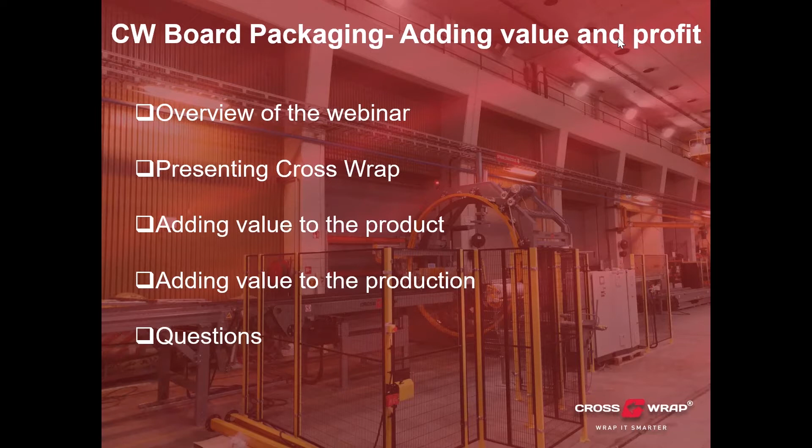Briefly about Cross Wrap as a company. Cross Wrap has over 25 years experience in engineering, manufacturing, and selling machinery to the recycling industry, to the paper industry, and to the wood and board packaging industry. We hold patents to all of our solutions, and we are based in Finland since 1994. Today we have deliveries in over 60 countries and around 600 deliveries.

As said, I am Martta Kivelä. I take care of the Italian market, and I do help out Kalle with the North American market, especially the west coast of North America. Then Kalle can tell a bit what he's doing in the company.

I do the sales in North America and Ireland, UK, New Zealand, South Africa, and then I do some help for the people on their sales and technical side. I have been in the business for 30 years and started out in service and installing, training, and so on.

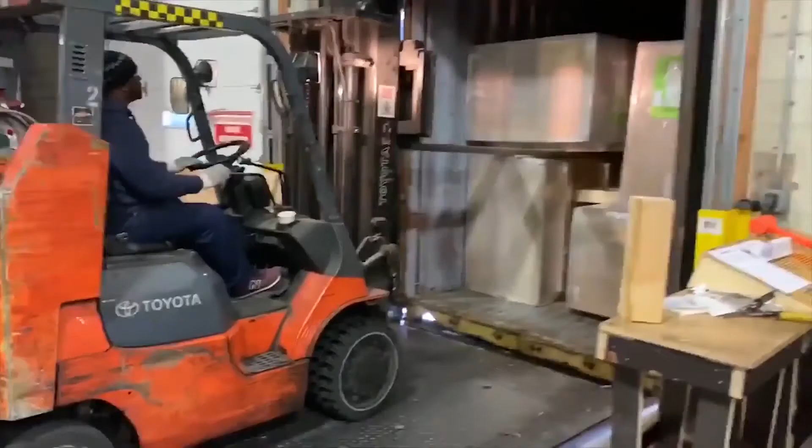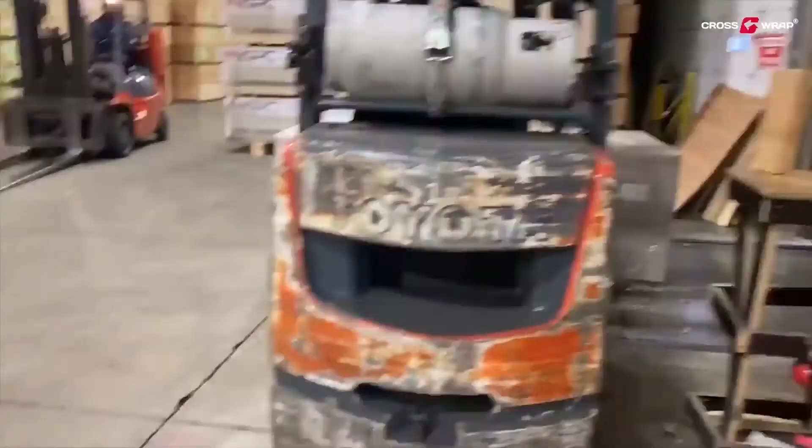So these packages come from Russia and are exported to US. As you can see, the container is packed in an efficient way. Some of the stacks are sideways and some are in a normal position, but the space is used

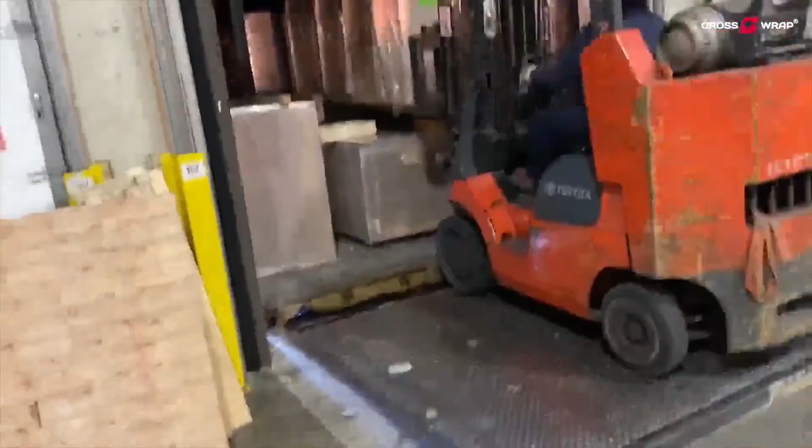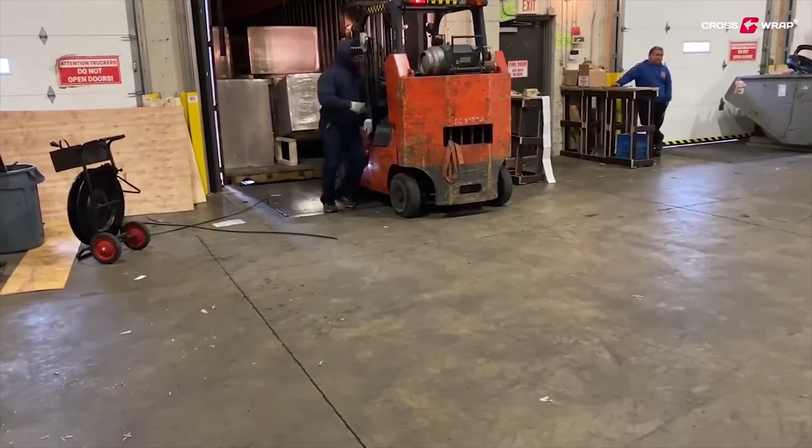really efficiently. Then when we want to turn the package that has been sideways, we can just flip it with a forklift, which you cannot do with a package with only straps or cardboard or manually wrapped with plastic, with film, sorry.

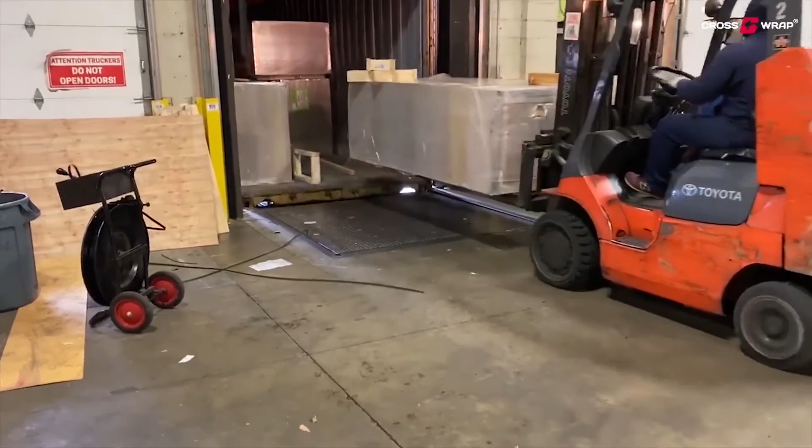And as you can see, these packages exported from Russia to US don't need any corner protections or straps. So wrap it right and wrap it tight, as we say it in Cross Wrap.

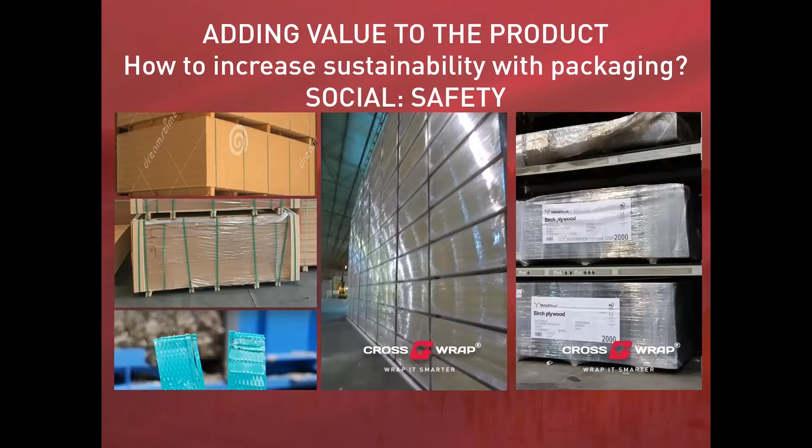Back to the presentation. So then we will have a look at the 3 aspects of sustainability. First aspect, the social responsibility. So, as we mentioned before, part of social responsibility is the promise that we make to the customer. We make the quality promise of our quality product that has to arrive to the customer

undamaged. With Crosswrap stretch film, 6-side stretch film packaging, we can do that. And the quality stays equal in 24/7 running operation. On the left side of this slide, we can see the alternative packaging that is tied with strap.

For the user experience, the strap means a safety issue within handling and transporting, because if we have the slightest damage in the tying of the strap, that means that the package is already unsafe to handle. Also, from the point of view of opening these packages, the opening of the plastic strap, not to even mention if we have a metal strap, is a dangerous process.

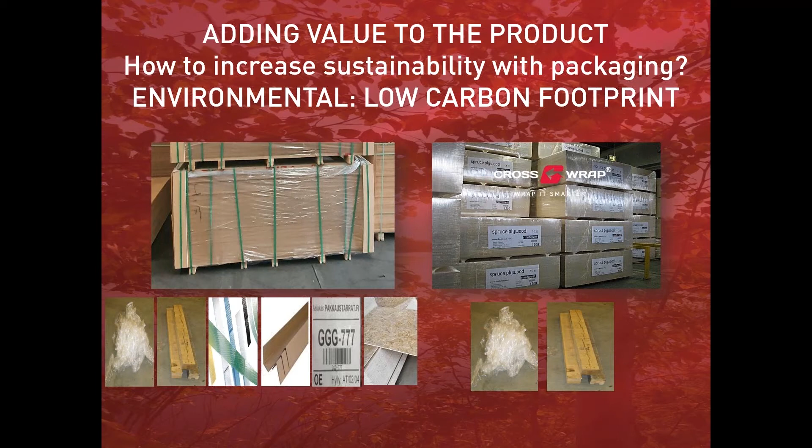When in cross-wrap packaging, we have to have 2, and if we want to put also the labeling here, Kalle will explain in a bit how it's done, but the label is pure paper. So every factory, every client, or in most of the countries, we have the paper recycling, and that's the most basic recycling we do. So cross-wrap ingredients are 100% recyclable.

So another thing is how much we have to use the packaging materials. So this is partially economical, the third point of sustainability, but also partially about the environmental point. If we start from the pictures below, as said, all of our wrapping is programmable. So, for example, in the case of the picture on the left corner, this is a package from our client from Finland where the material is going just 10-15 kilometers from the factory. So they have put only the plastic around the bottom skids, saving material.

Well, the next option is if we have like a national transport or short transport within Europe or within US, for example, we can do only the vertical wrapping. As you can see, even in this one, we already cover the corners really well. So the boards are protected, but at the same time, we save material and of course we save in packaging cost.

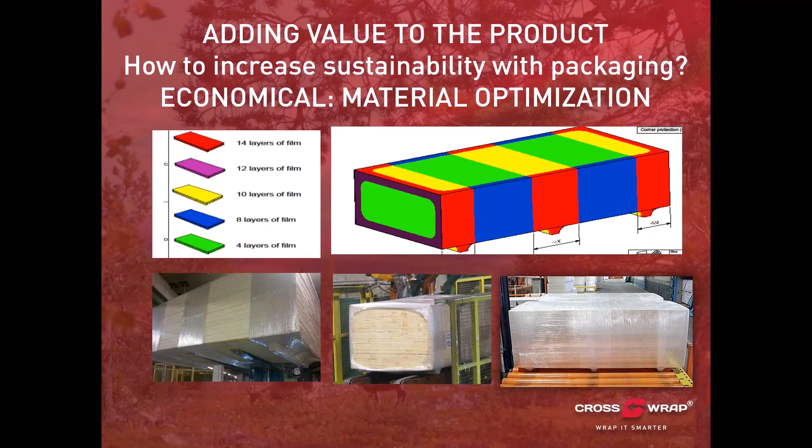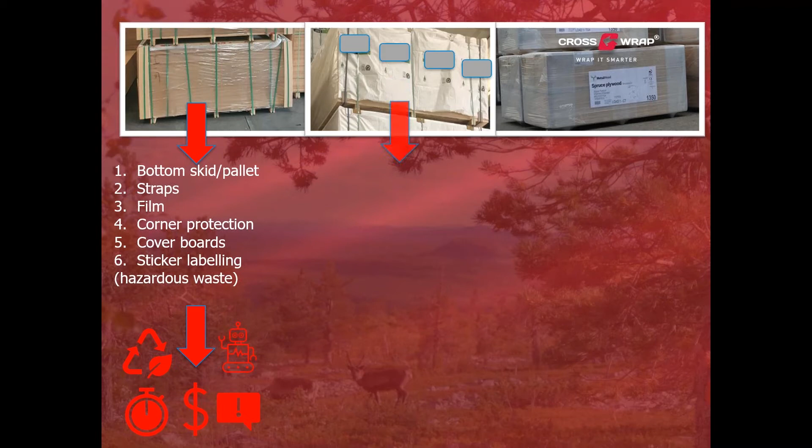So then a second alternative option, not Crosswrap. We get more or less the same materials, except the plastic used is a bit different. It's like a plastic cover, or plastic hood, some call it. So that is not weatherproof and not waterproof, and especially if we have the boards coming from the production with a bit of heat on them, if we put the hood on directly, or if we have an environment where there is moisture, we get a greenhouse effect inside of the package, which again damages the goods.

So the same things, recycling value is low and the process is challenging. This is time consuming because this is a partially manual process. We use money for the partially manual process and all of these materials. The reclamations are a risk because the package is not tight on all ends. You cannot flip this kind of a package as we saw in the previous video, and it's not an automated process.

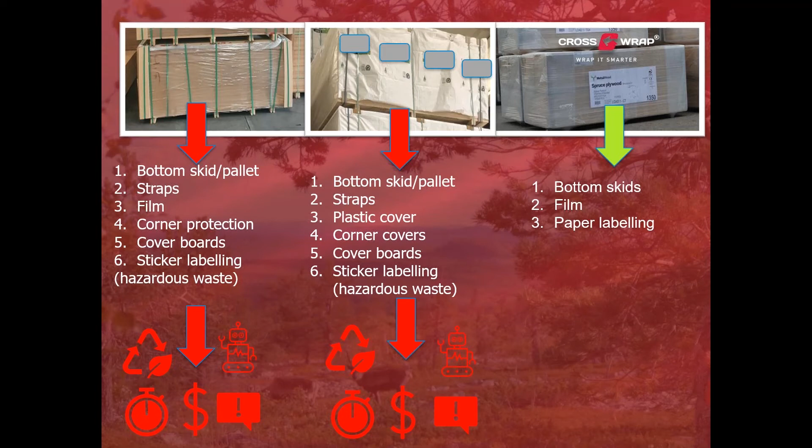All right, last but definitely the winner is the Crosswrap packaging. Maximum of 3 materials: bottom skids, film, which is 100% recyclable, and also now we are doing testing with plastic film that is made out of recycled material. So the recycling value is good.

The packaging is completely automated, no manual time used. We are saving in material costs and labor costs. We get good feedback from the customer since we are clearly informing and communicating with our packaging, and the customer experience of the package is good. And most of all, the process is fully automated.

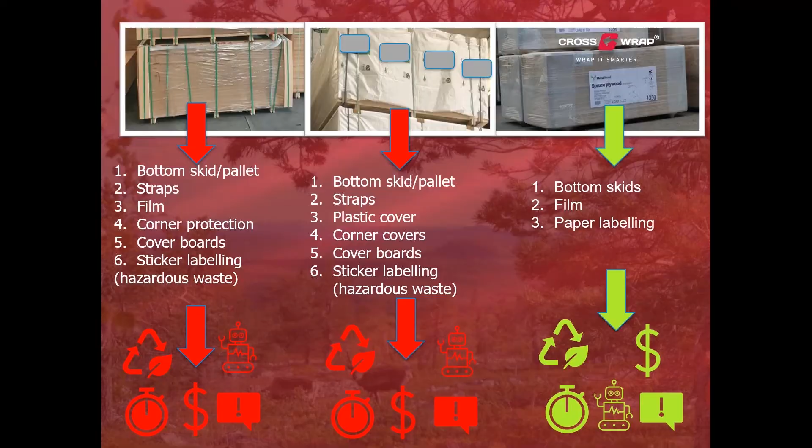All right, that was my side of this presentation. Next, we will go to adding value to the production, and Kalle will take this over. All right.

The line today is fully electric, with low electric consumption, and it's low maintenance, which means low costs in using this kind of line. Remote access has been in our machines since 2013, which means we are able to serve you wherever you are. We are in 60 countries, serving a lot of people in 24/7 operation. We see that as important. We don't sell our machines without that connection, because our machines are made for it,

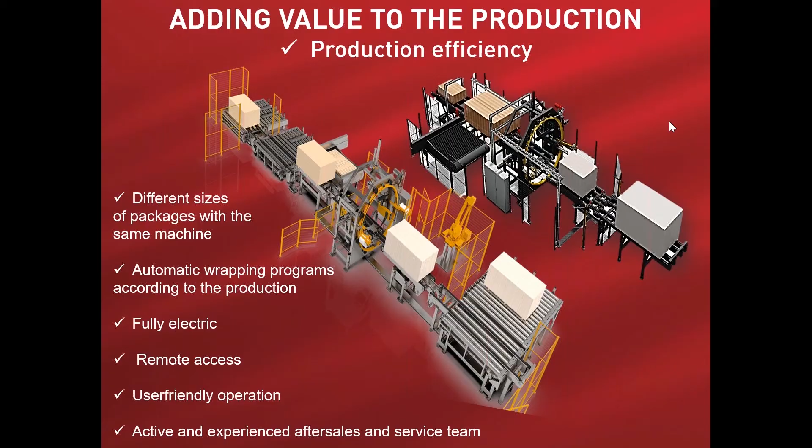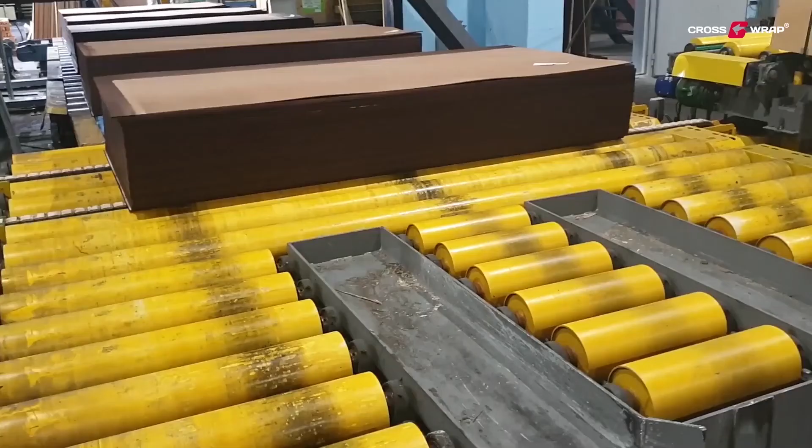But let's look at a video of how this system works. As mentioned before, we can make a line which comes directly from the production. We have made lines that pick up different packages from 3, 4, or 5 different production lines, because the line can do everything automatically. It doesn't matter which kind of package is coming. It will automatically measure the package and take it further into the production.

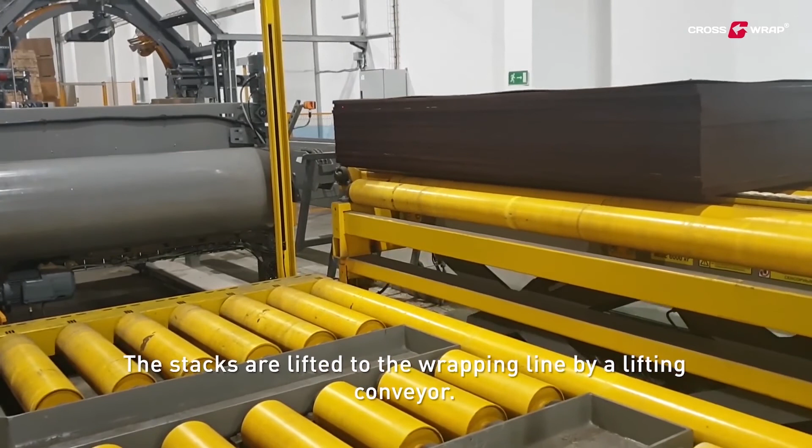In this case, this package is now measured automatically by the line, and this is the guy who runs the whole packaging process. The machine itself chooses what kind and what length of supports, beams, called bottom skids, you put under, and we can choose how many we have. You can choose where they are, if you want to put 2, 3, 4, 5, and how many you put for different lengths of packages and where they are.

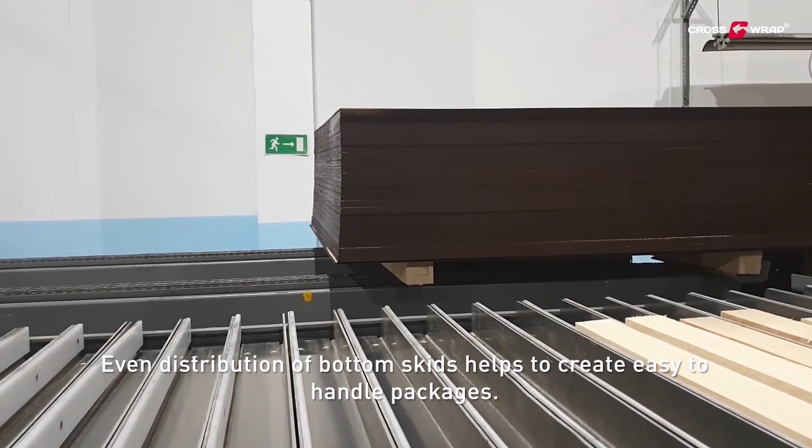And it's safe, of course, because it's inside the fencing, and the machine does that automatically. That's one part of our strategy and idea: safety comes first in all this packaging, because as long as we take the machine into our line, everything happens inside the safety fencing, so you don't go into the areas where the package is moving.

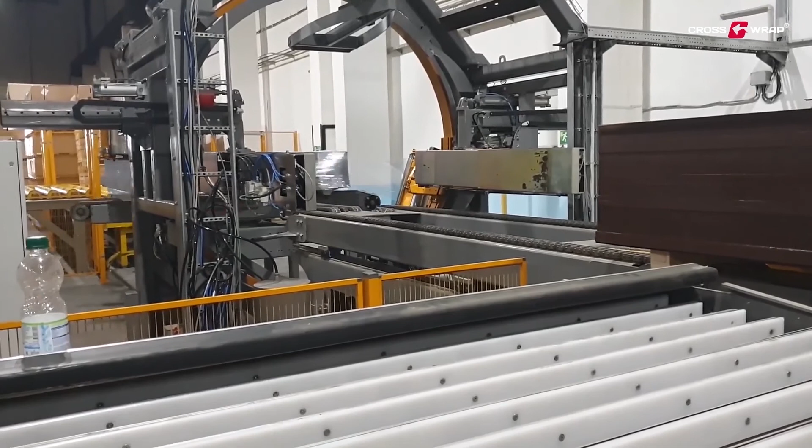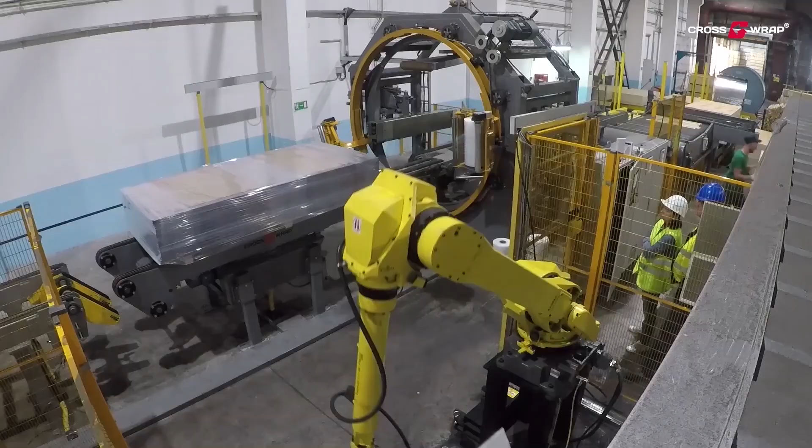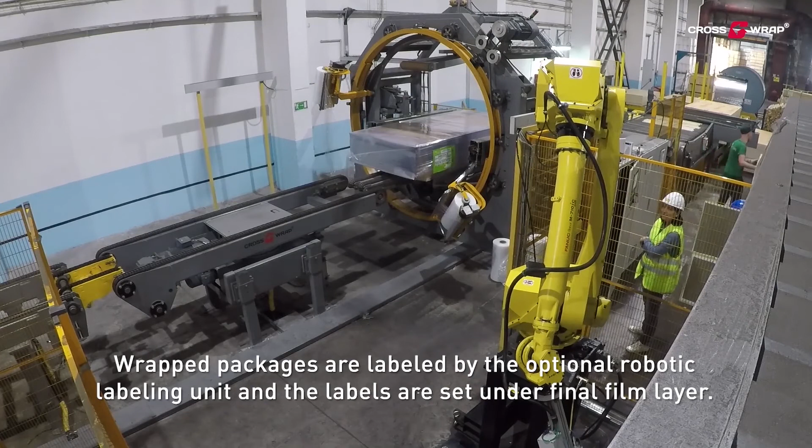There we see one package already in production, and the next one is coming in. The conveyor in between here is the first wrapping conveyor, where we have a weighing system if it's needed. If the weighing system is there, then this label already has the weight of the package and other information. That label, in this case, is just A3 paper from a normal printer, and you can provide that information from your system.

Then when the label is on the package, we put the cover, the last final wrapping, on it, so the paper label will be inside those last layers, and it's visible and you can read it. If there's a code or something, these couple of layers of highly stretched film don't bother the reading of the label and marks.

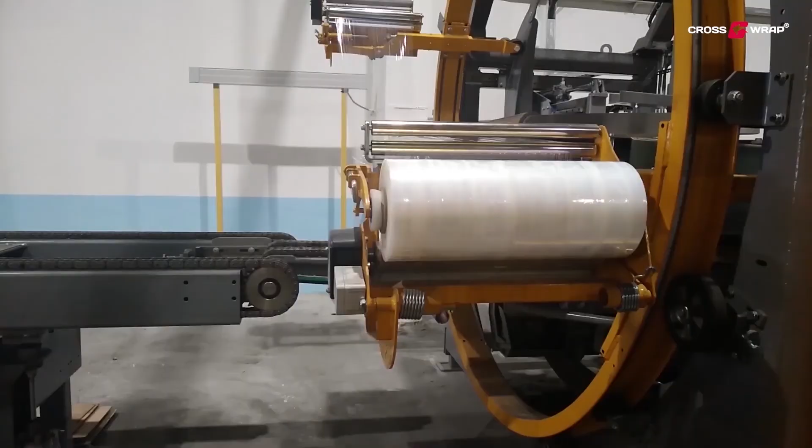So then when the package comes from the production, there's a first step when it's measuring the package and then finding the place where it starts.

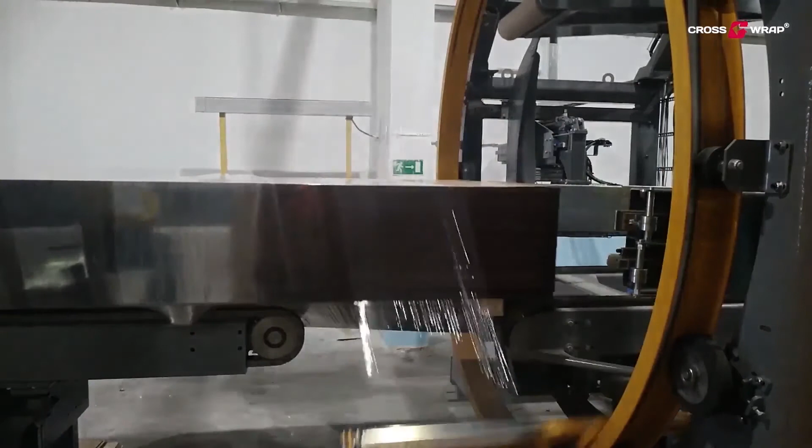We put the film over the corners and underneath on the first support skid, and then it goes further, and here we put the extra layer after the second one. The machine is recognizing where those supports are, that the film comes in the right places, and we optimize where the film is used and how much we use.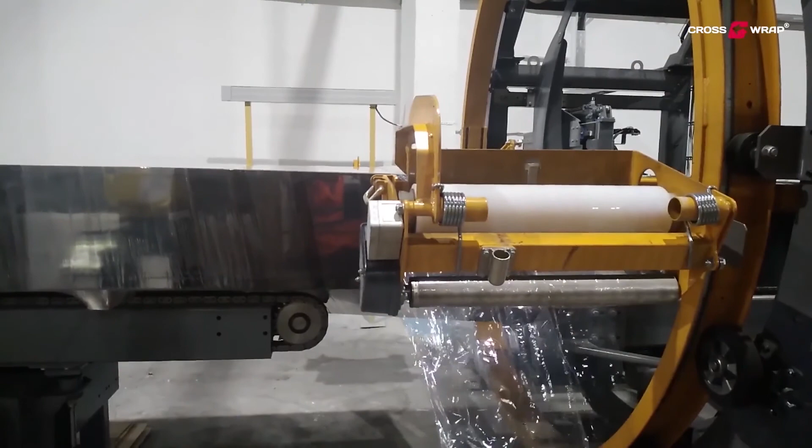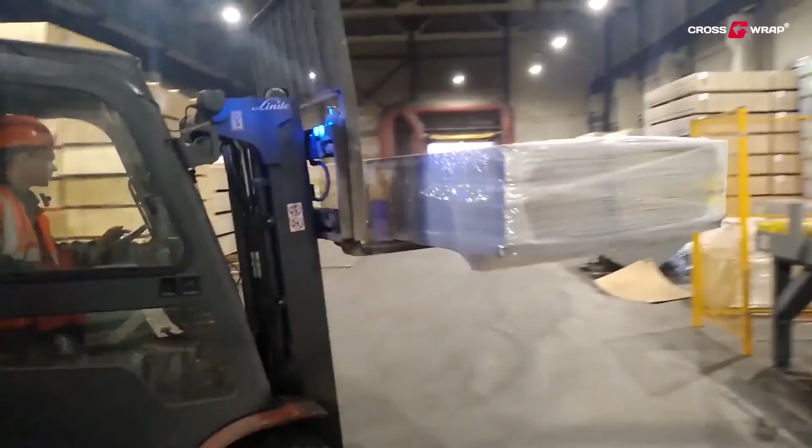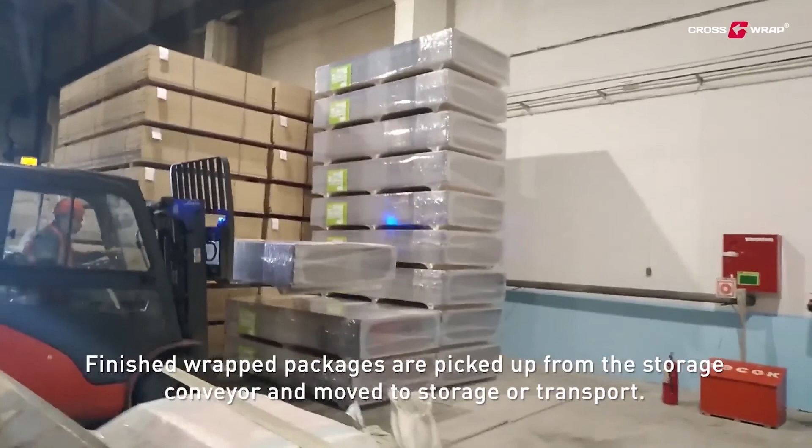All this can be programmed, and there are different recipes so that for different materials you can use a different amount of film, so you don't waste film, but the other way around, you have enough protection for the package so it can be safely stored, moved, delivered to the customer, and your valuable product will be even better when it reaches the customer.

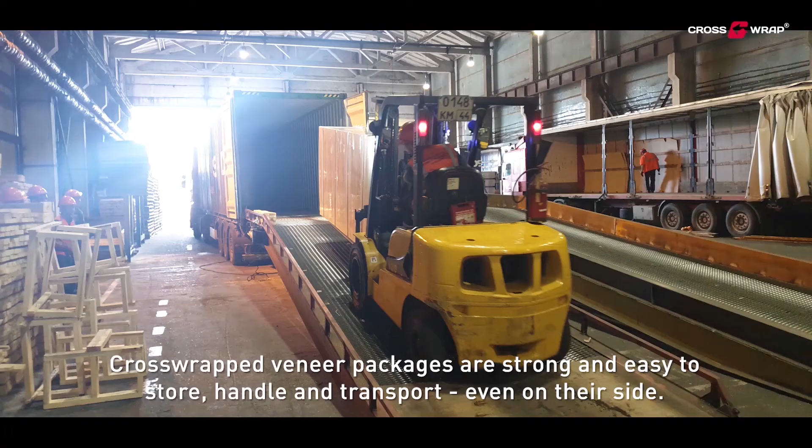That has actually been tested, for example in plywood or other wood-based boards, that the moisture content in a package will level out when it's stored in cross-wrapping. For example in veneer, it's nice when it's leveled and every single veneer package is the same after staying in our package.

Here you see the container, how this one is packed. You see how you load it, but yeah, we can do those turning packages as you saw there.

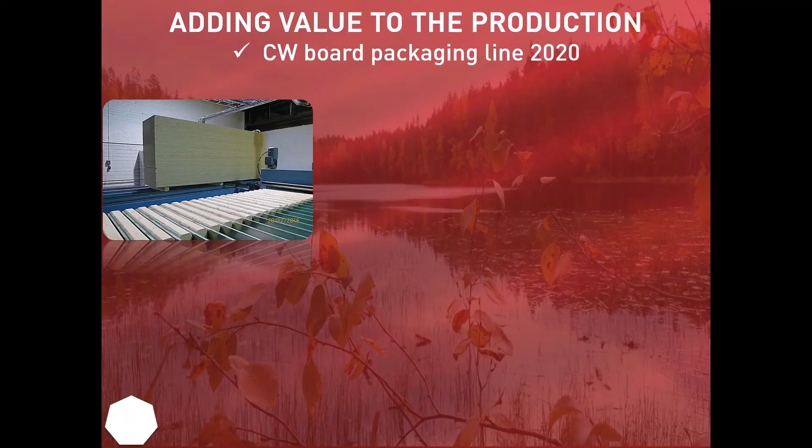Okay, let's check that process again once more, easily. The first step, we can make those conveyors so it comes far as the packaging. Here we have the line that it's coming in, and the package is measured, and this bottom feeding is done. On this conveyor where it goes, we will make the weighing for this package too.

So well, we have an option for semi-automatic skid feeding too, that if the volume is low, the same person can do the skid feeding manually.

And it can be done in a process. Then we have the first wrapping cycle, we saw that already once, that when it starts and is done, it's protecting the corners and taking the skids under, and that's done in the first step.

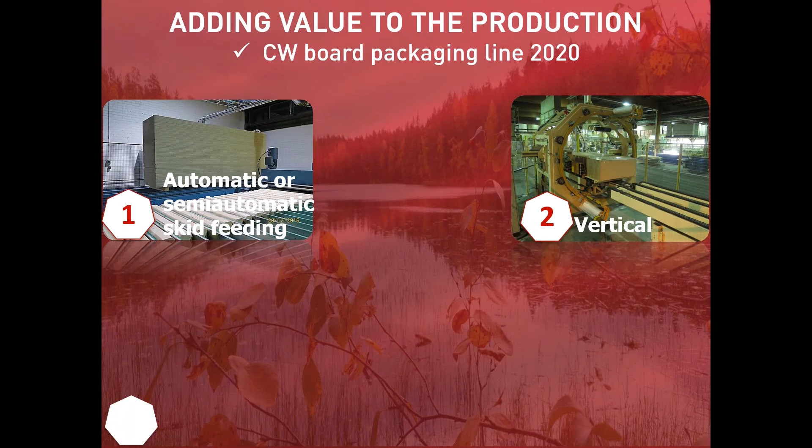Then we go for the second step, where we do horizontal wrapping, which will protect the corners again, and there will be overlapping in the corners to protect against the moisture.

But one more thing which is really important here, we call this cross-wrapping 3D, which means we have first vertical, and now we make it horizontal, meaning there's a vertical layer underneath the horizontal that ties up on the side, and at the same time, for example in a program here, we add a couple layers of vertical.

The horizontal, we can do for example the tongue and grooves without any extra protection, what our customer has been doing for years and millions of cubic meters, very successfully.

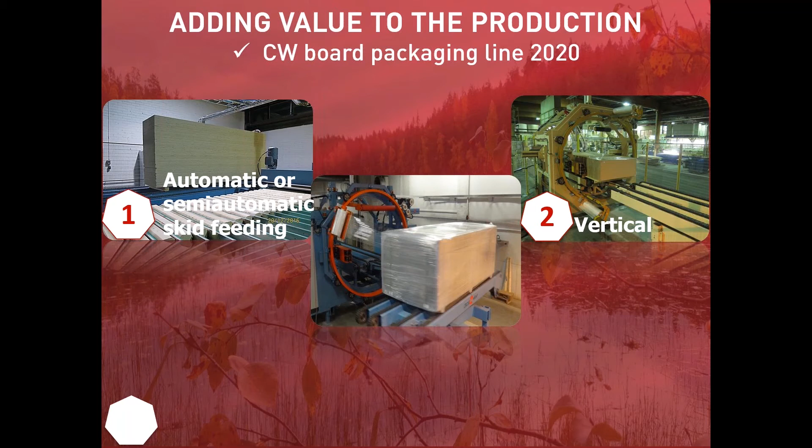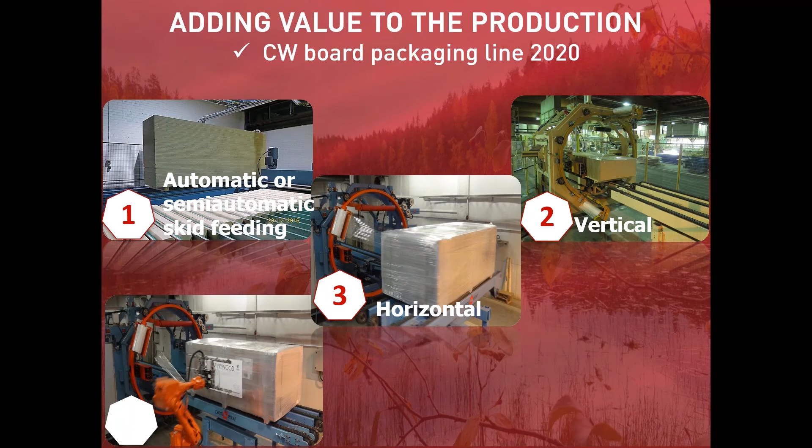Then the next part is the labeling. Here you see the labeling unit, which is putting a bigger label on it. That happens so there's a big label with, for example, the company's logo and stuff like that, and then you put a second smaller label on the same paper, and then it's put on the package, which is an easy way to make your product look more in line with your company profile.

And then we are finishing the package with the vertical last layer, which is part of the 3D, an important part so the package will withstand all the handling and the moisture and so on, because the third vertical layer makes a cross-wrapping onsite, which, for example, when we have a high cross-wrapping onsite, the package wants to remain in the same shape.

That's very important for transporting the packages, which you can't get this kind of advantage from any other packing system.

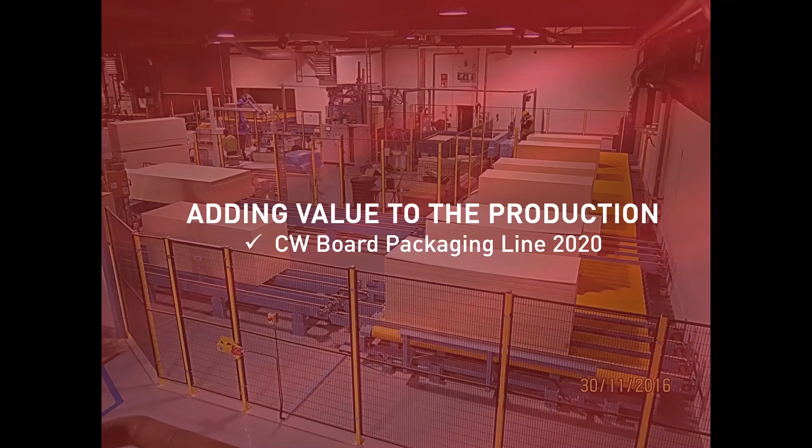So, adding value in production. Here you see one production line where the packages are coming from two conveyor lines direct from the production without any forklifts on the way. There's one person looking after the machinery. Right now, he seems to be sitting there and waiting for the machines to do the work.

The packages are coming in. We make a weighing. We put these beams underneath, the bottom skids. We put the label, and then it goes automatically out from the door, which is behind there, to the storage where it can be picked up.

Huge savings, environmental benefits, and only one person needed, not a lot of staff, and then there's no forklift hassle or any danger for the operators. So that's part of our idea.

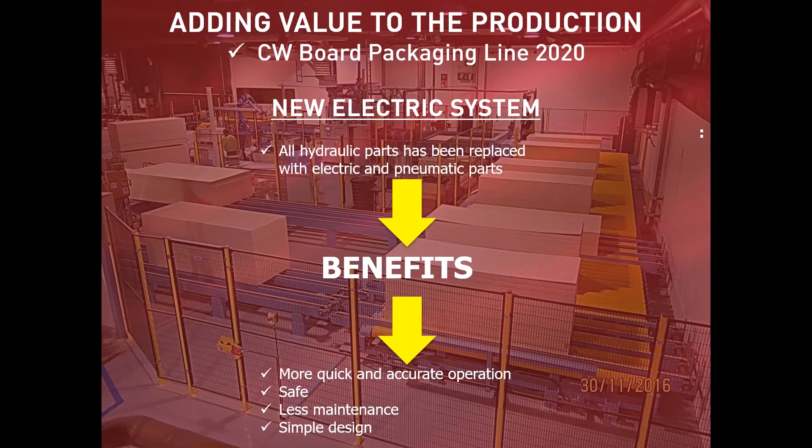What is new today is that the whole system is electric, and that means of course it's quicker, more precise, safer, less maintenance, and a simpler design. It makes the whole thing more simple, stronger, and cost effective, meaning less cost for you.

There's just a few examples of what we have done in our latest machine. On the right, I'll have to point out that the main thing is the stretching unit, which makes the film stretching, and of course how and where the film is put is important.

The 3D cross-wrapping system is the only system which can give that kind of withstanding for the package, as we do today, and where we have got our reputation having the best package in the market. There's a lot of customers who prefer this one, some in Mexico and some in the US, who like to have only Crosswrap packages, and we hope to serve them in the future.

But the example, the stretching unit here, it's very simple, strong, and it's fixed so that you can't change these gears. It will keep and do the work year after year.

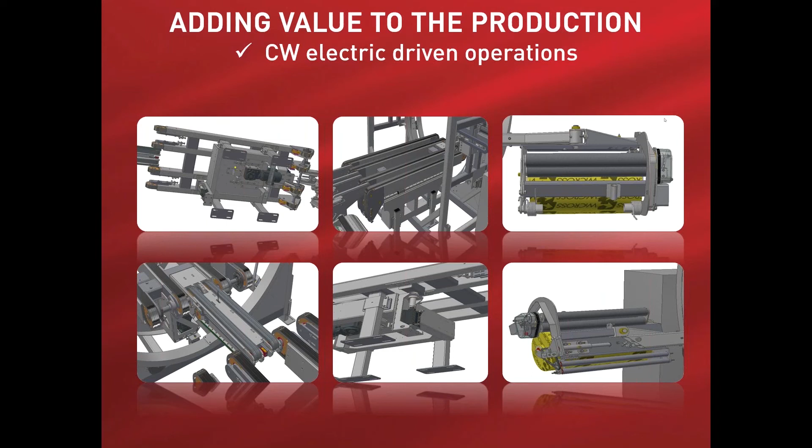One other thing where we have been concentrating development and experience is the seaming unit: cut, hold, welding. Everybody in the packaging business who works with any film cutting, holding, or welding systems knows that's the place where service is needed the most. This is a new system which is controlled by our program.

It has pneumatic cylinders, and its main function is run by sliding bearings, very heavy ones, and then there's fluid muscles. It's a very simple construction, meaning that these main parts last for 1 million cubic meters. I can say that this is top of the range in the business, having the most reliable unit in the market.

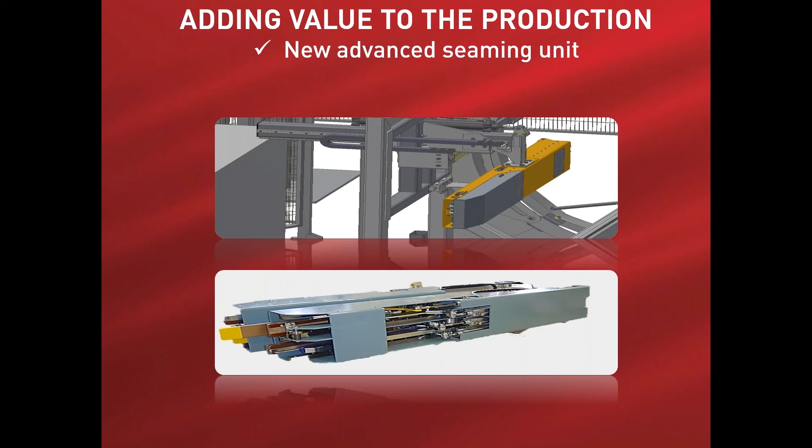This is an example, and most of this stuff we can upgrade on the old machines. That's one of our priorities - we like to serve our existing customers and upgrade them with our development, which we've gotten through customers who have already driven millions of cubic meters of different kinds of boards. There are machines which have already wrapped over 2 million cubic meters.

Then I would like to point out that in electricity, we have moved to a decentralized system. On the left you have the kind of conventional electric system where all the cables come from the main control unit and go to the sensors, inverters, oscillators, and movements.

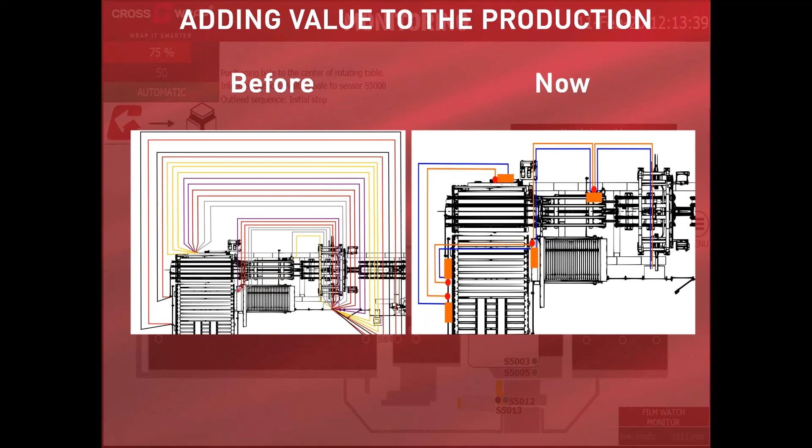But today we have only a few cables, and they go to the main inverter box where we take them out for sensors and so on, which means it looks like this today.

One advantage here is, for example, when installing the machine, you just have to have an electric guy for the main electric, but all these are connected by plugs, which are industrial plugs - you just put them in and that's it. You can't make mistakes on those, and the connection is better than man-made on every single connection.

Cables are better protected, it's easier to follow, and it gives us more possibilities for remote control. It's just a piece of art today, but it gives you an advantage - it's easier, it's safer, and it's costless service-wise, and it's easy to check what's happening if anything is going wrong.

So today, we have been moving - well, we have always been with Siemens, but we now have the Siemens S7-1500 series, which has given us more precise programming. It's faster, and it's the latest model which will stand again for years, giving you a benefit in the long run.

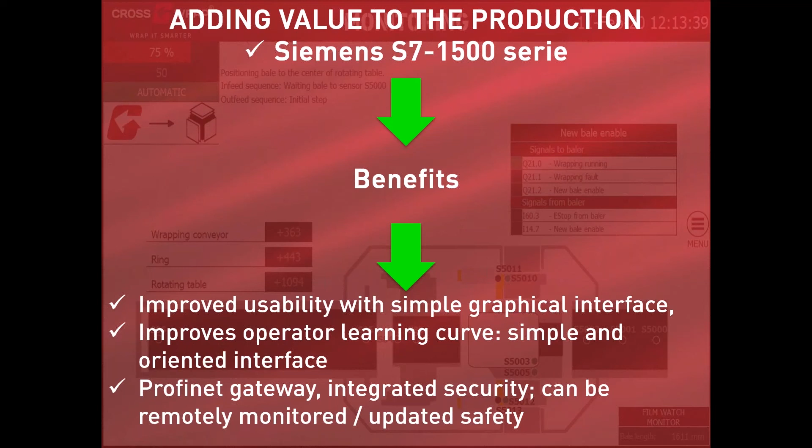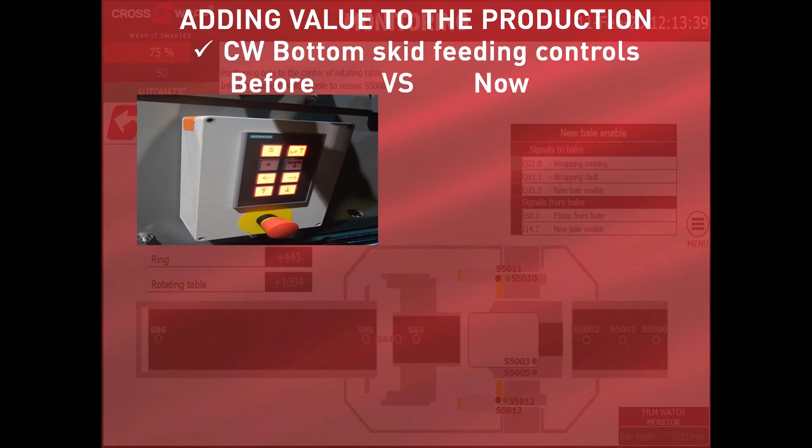An example here is the bottom skid feeding - this is what we had before. You have push buttons there where you can just move the skid feeder somewhere, but we moved it to this kind of touch screen where everything is available and visible. You can run the conveyors and run the bottom skid feeder there, and it's easy to run.

It's just visible. You can change the language for yourself, and from the same box you can choose the programs for where and how many skids you will put in different places. We have different programs that you can save to memory, which puts different skids in different places.

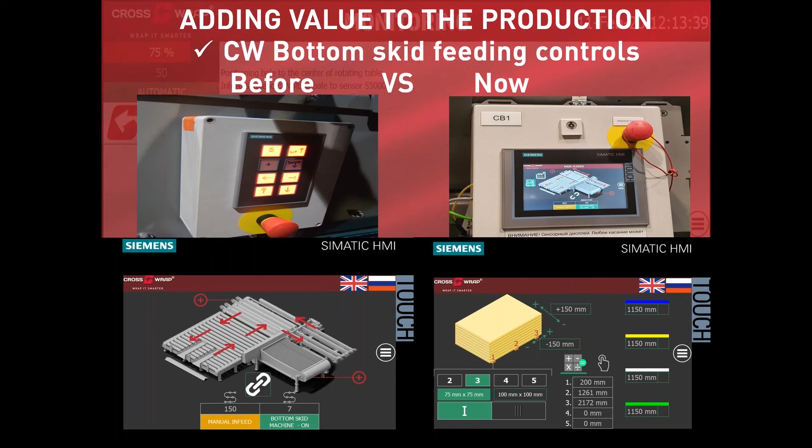That's valuable because you will only use the skids you need. And when putting the skids on, our skids don't have to be the length of the package, meaning you're saving on those costs too, because they are shorter, and because they are underneath the wraps, you can use materials you can't use if they're not protected. Think about using skids which will be lower cost - that will be an extra saving on your packaging.

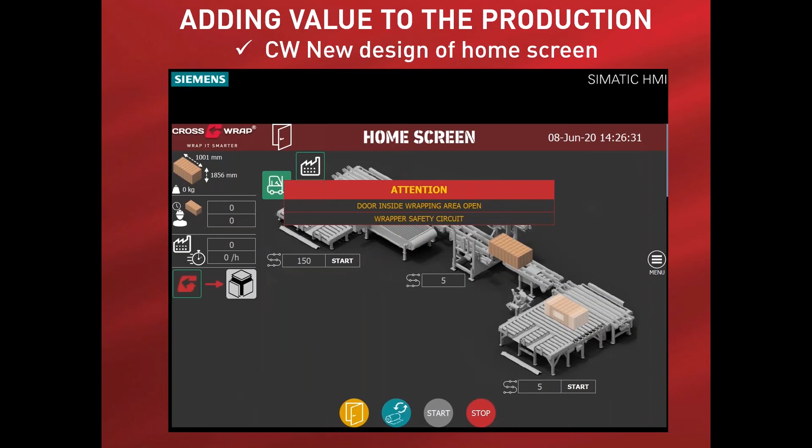There's our screen today, which is very visible, shows you most of the things, shows where the package is traveling on the machine, and the push buttons below are on screen, that they are not built in anywhere else, that you can just do everything from this screen. And the help desk is quite large here, that we have been concentrating on making it easy for the end users and operators to use it.

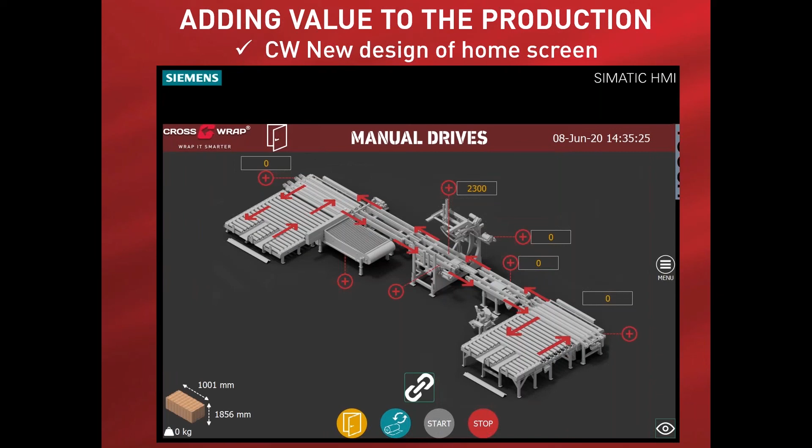Example here, you have drives that you can run the different conveyors to different ways, or you can run a couple of the conveyors by pushing first the chain there.

Adding the value in production, cost-wise, what does it cost to do cross-wrap packing? Well, it's quite low. The film costs today 1.5 up to $2 or less. And what you use there is 1 kilo, or it depends on your material. It can be less - it could be 700, 800 grams for 6-side wrapping, up to a little bit over a kilo when you have a high-end product which is really slippery with the film.

But everything is programmed. You can program it, and you can go down to half a kilo per cubic meter on some programs.

Electric consumption is very low, and here you have to think about it - if you do it manually, how many forklifts you have running in the area, how many people you have there, and how much space you need. Here it's just a short part - your footprint is small, and it just comes through the packaging line and it's done, it goes out.

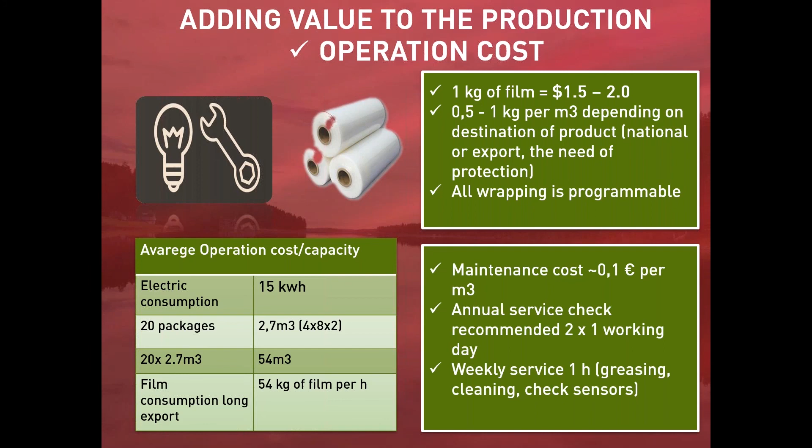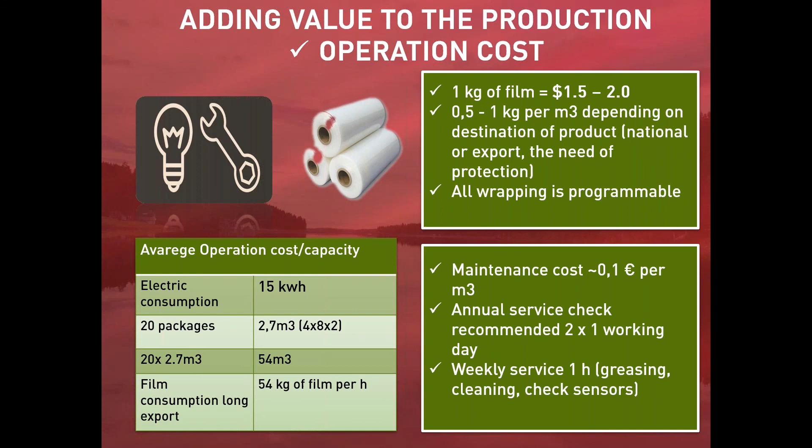Maintenance cost is very low because of our construction and the heavy made packaging system, which we'll say is lowest in the market in that way. And then it's just the greasing and checking the sensors, and that's about it almost.

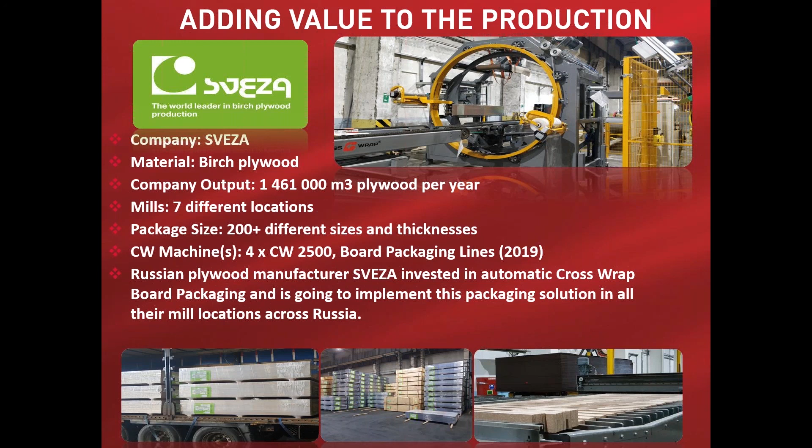So we have machinery today around the world, and we are happy to serve you too.